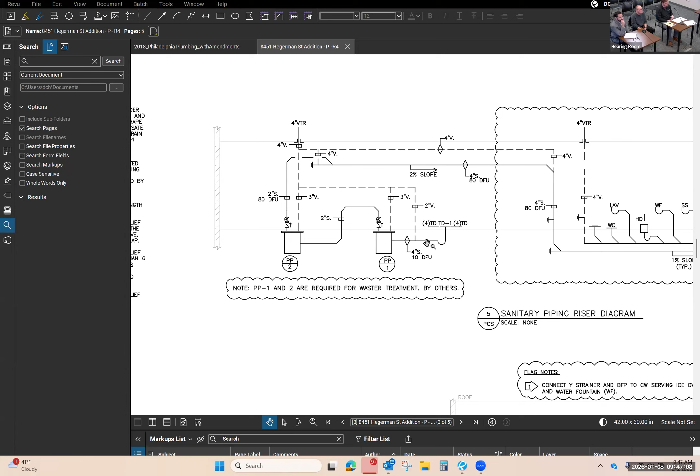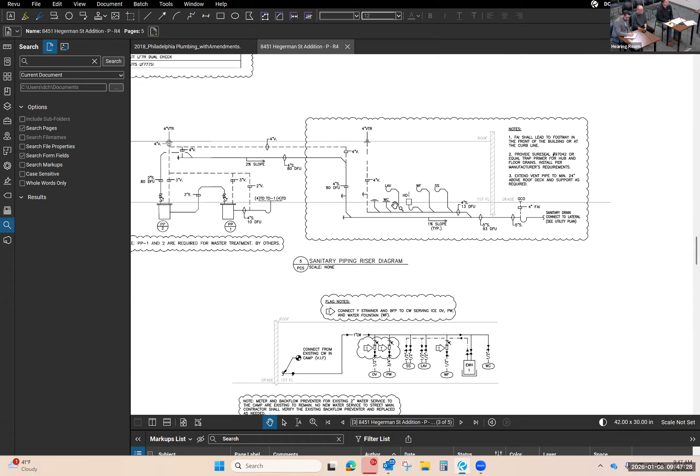Listening to Brian's questioning and looking at your diagram, I want to make sure I understand this. The drawing submitted for the permit, the hand sketch, indicates the sanitary riser diagram for the permit. So I understand this would be your floor drain or trench drain that collects the effluent, and this would be your below-grade tank, correct?

PP1 and PP2, I believe, are the pumps. Let me confirm. I'm wondering why the drawing doesn't show the tanks. That's the real question here.

This flow chart diagram is what you guys were just reviewing? Is this the actual condition, or is it what's on the permit drawing? What you have in your hand is what I currently use today. So this is the existing condition? That is correct. This is proposed? That is proposed.

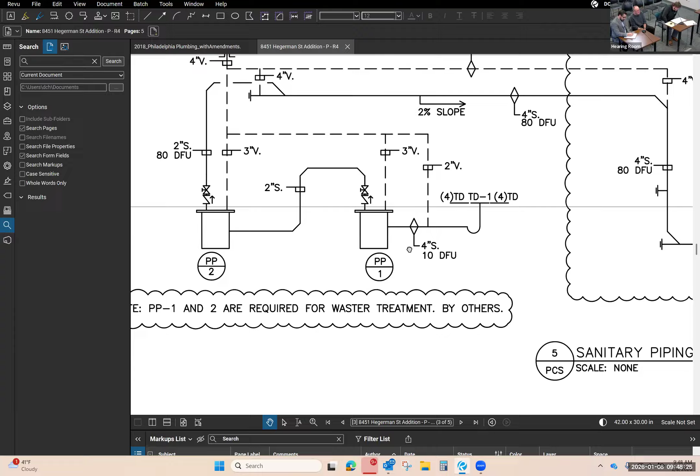So there won't be an above-ground tank? There will be an above-ground tank, but it's not shown there. The reason is the above-ground tank has to be sized for the amount of water flow that comes in, and at this present time I don't have the ratios for the equipment.

So once we have that information, we'll formulate a tank and build one. Understood. So two below-grade tanks means two pumps? Yes, each one has a pump. And then the above-grade tank would also have a pump. That is correct.

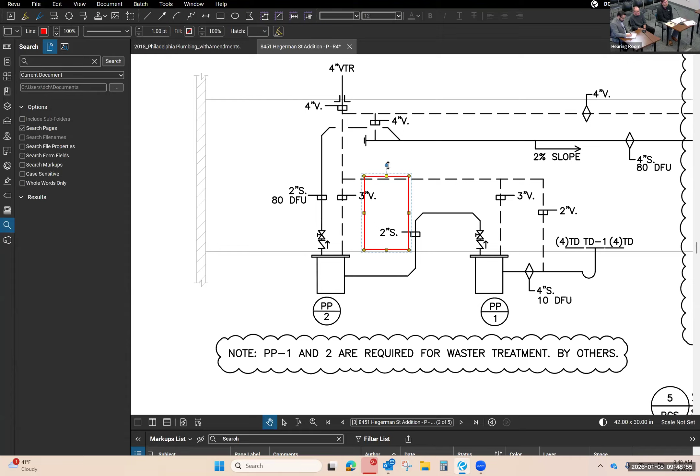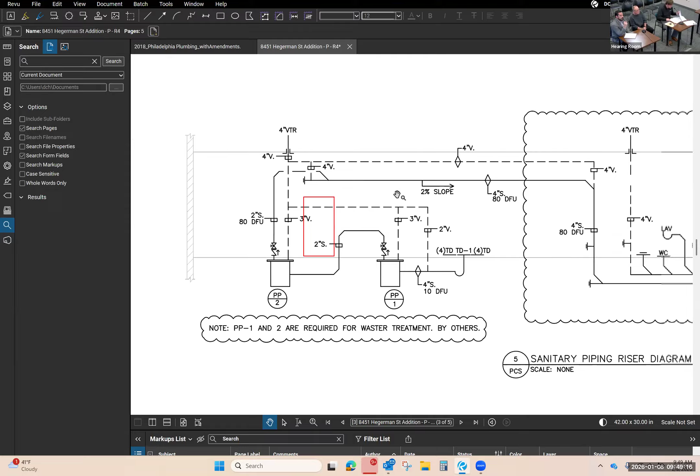The 2-inch forced main here, is that distance 400 feet? Or is it sloping here? This is your gravity to 4-inch at 0.02 slope, 1/4 inch per foot. Is that 400 feet? Where does the 400 feet come from? I think that distance is from where the outlet at the edge of the building is, on the side of the building, where on P100 the line feeds out to the side of the building.

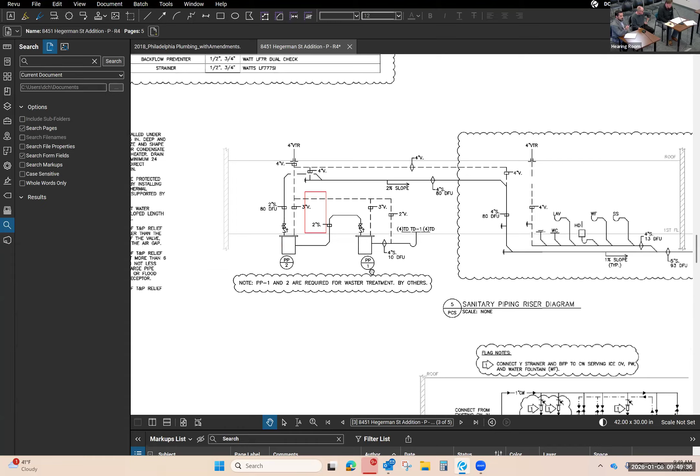That's the 4-inch by gravity at the ceiling? No, I think it's in the clouded area. Should be a 2-inch line, shouldn't it? Yeah, it's 2-inch to the ceiling, and there's your toilet room gravity sewer going out.

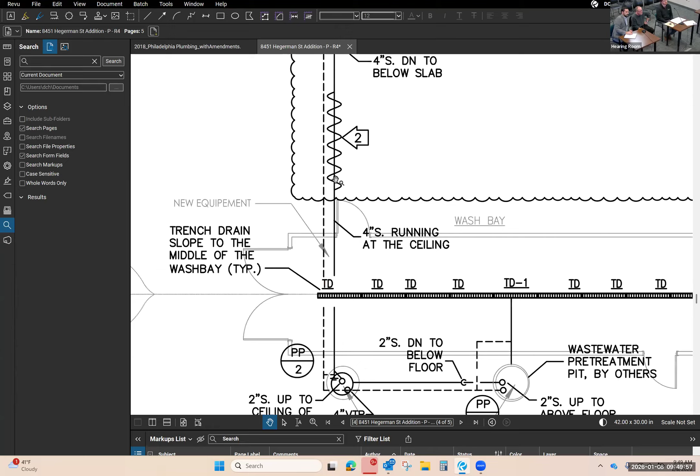This pipe extending the length of the building, is that above the ceiling? No, that line your mouse is on is going down to the slab, per the note on the left-hand side. And this is at 0.02? I believe that would be minimal 0.02, yes.

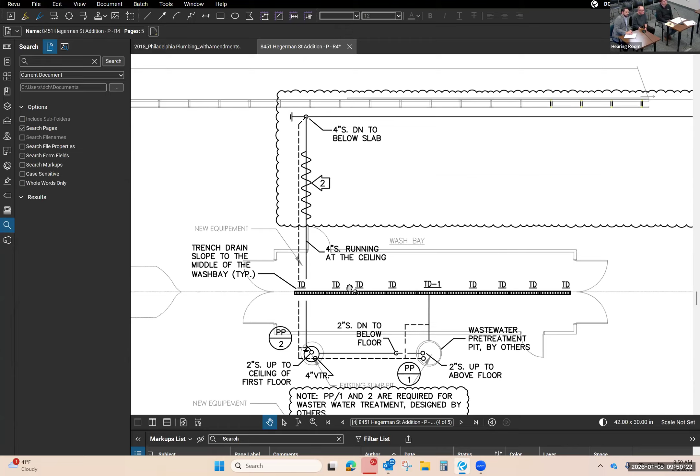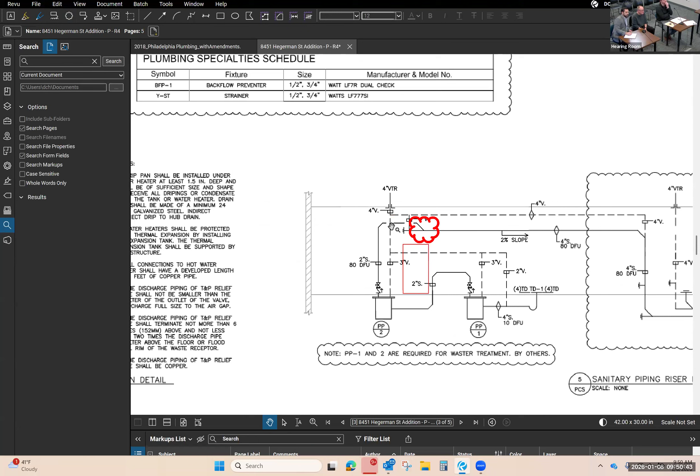Understood. So this pipe here is at the ceiling. There's your drop, and on your drop, this is where you'd be tying in your force main, at this location here. Yes, it appears that way. Understood. So this is all gravity at the ceiling, drops down, then runs gravity the length of the building, and ties in with your toilet room.

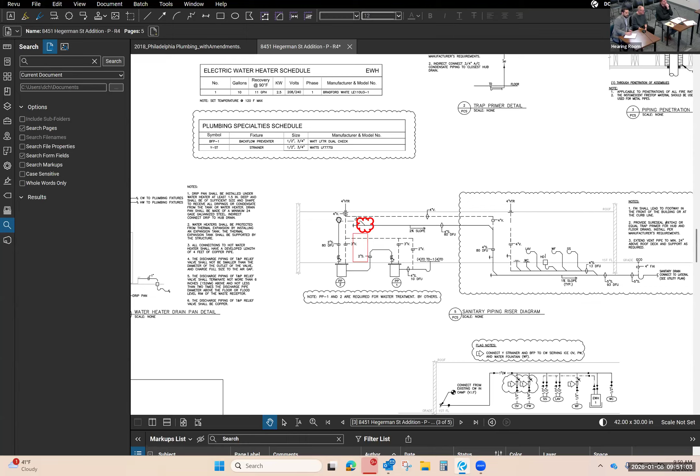Who do we have here? Bill Dobbins? Mike Ingram?

What's the skill set or skill level for the individual doing all the testing and monitoring in our facility? His colleague, well, he's graduated from college.

Okay, does he have a chemical designation for this? Is there a designation for the testing? What do we call the individual? First, define what you're monitoring. We are monitoring water quality, per PWD, and the actual implementation.

It's like when you go to the restroom and on the back of the door it says 'Bob was here, it was clean, it was done.' So who is that individual? Is that just any Joe, or is that the person with the designation?

Do they require qualification? Are they certified to do this? If you're asking about the testing, the person who tests the materials before it's released to PWD has gone through various programs provided by the chemical company. PWD also furnished us training. The gentleman who does the testing is one of the supervisors on the floor, so he is responsible for making sure it's done correctly, and only he does the testing because he has to sign the sheets.